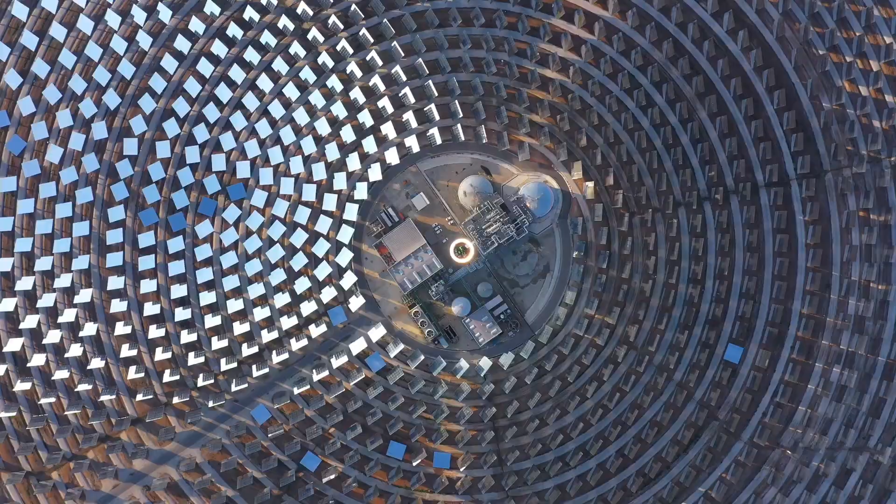So today, we will together go through four main sections: a little background about BMW, then the BMW iFactory, some of the pillars, and lastly the benefits the company received from the implementation of IR 4.0.

BMW, the acronym of Bayerische Motorenwerke, also translated to Bavarian Motor Works, is a German multinational manufacturer of luxury vehicles and motorcycles, founded and headquartered in Munich, Bavaria, Germany. The special fascination of BMW Group lies not only in its products and technology, but also in its company's history, written by inventors, pioneers, and brilliant designers.

Today, with more than 30 production and assembly facilities in 15 countries and a global sales network in more than 140 countries, BMW is a world-leading manufacturer of premium automobiles and motorcycles and provider of premium financial and mobility services. In 2022, BMW produced and sold 2.39 million passenger vehicles and 169,000 motorcycles.

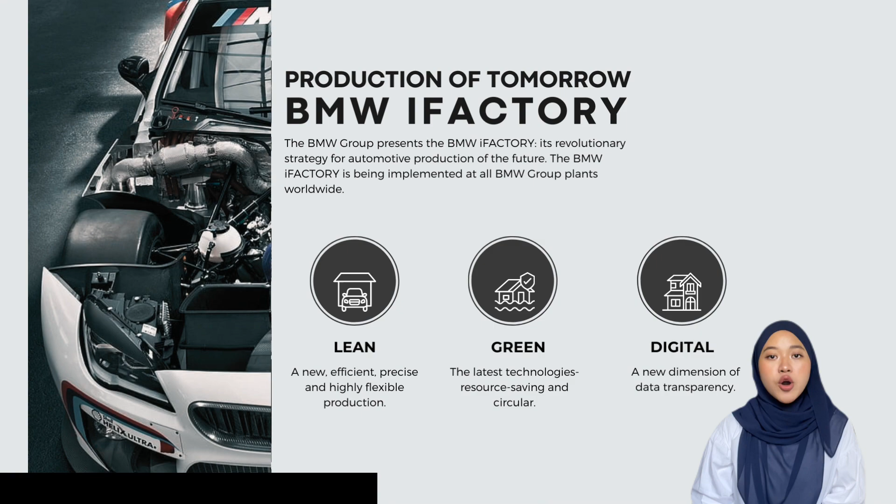The BMW iFactory is digital, using data science and artificial intelligence to become even faster, more accurate, and more transparent. In general, Industry 4.0 refers to smart and connected production systems designed to sense, predict, and interact with the physical world, so as to make decisions that support production in real time.

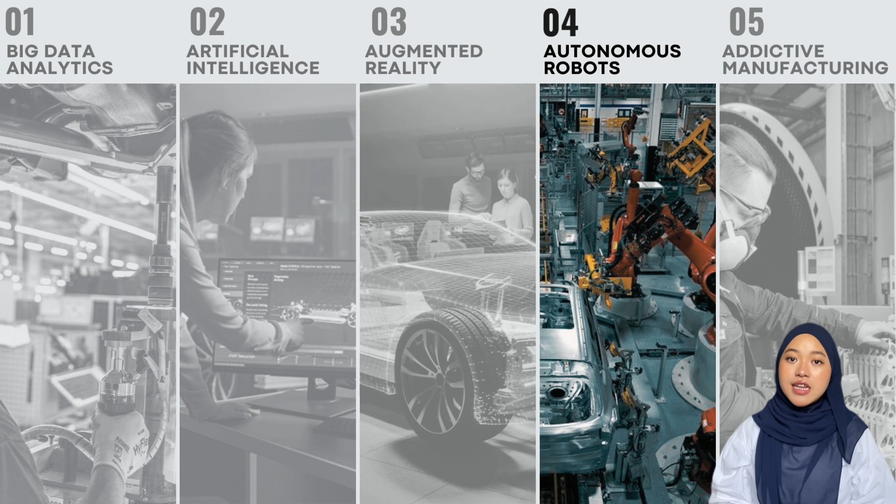Nine pillars have been introduced to guide manufacturers in transforming towards IR 4.0, and these are some of the pillars that BMW has implemented: first is big data analytics, then artificial intelligence, next is augmented reality, then autonomous robots, and lastly additive manufacturing.

The BMW Group calls it smart data analytics, which includes applications used to capture and evaluate data and improve processes. For example, they enable a 3D image of the production plant to be generated with millimeter accuracy. This 3D model can also be used for modification and calculation at the factory.

Besides that, an innovative Nutsetter is also utilized by the BMW production team. The algorithm analyzes thousands of bolt connections in vehicle assembly and provides important input for more reliable identification of errors before they occur. A green light means everything is okay.

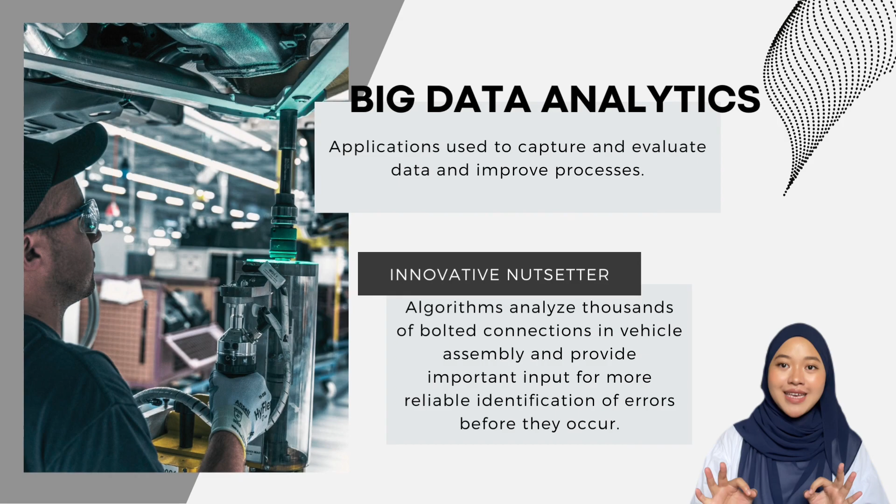The second pillar is the key technology of the 21st century and offers a great opportunity for technology, society, and the modern working world. Artificial intelligence is closely related to the first pillar explained before, which deals with data analytics and machine learning across the board.

So they apply AI to check model inscriptions against order data during the final inspection. For instance, AI alerts the employee if any inscription is not correct.

Besides that, AI is utilized to optimize robotic and material flow, as well as take simulation in the planning process to a new level.

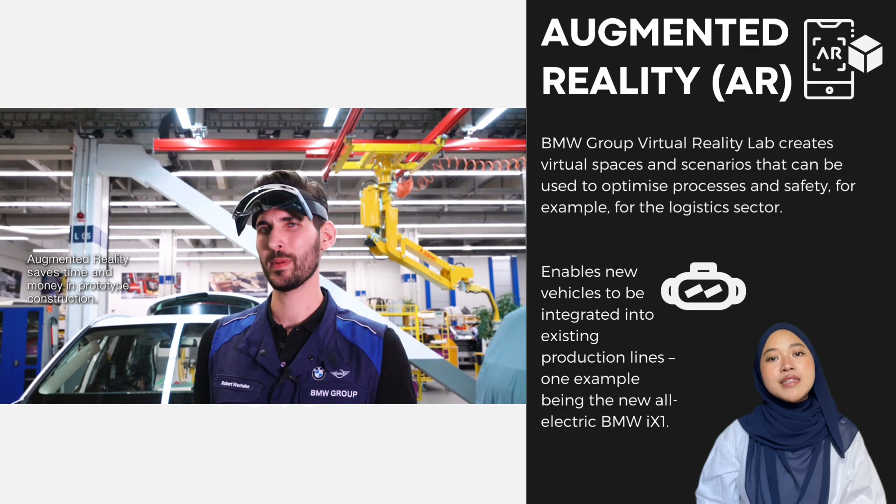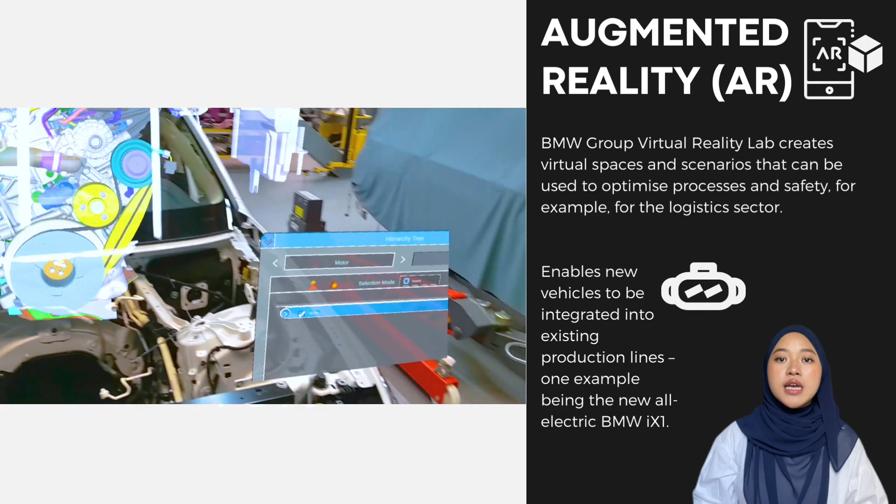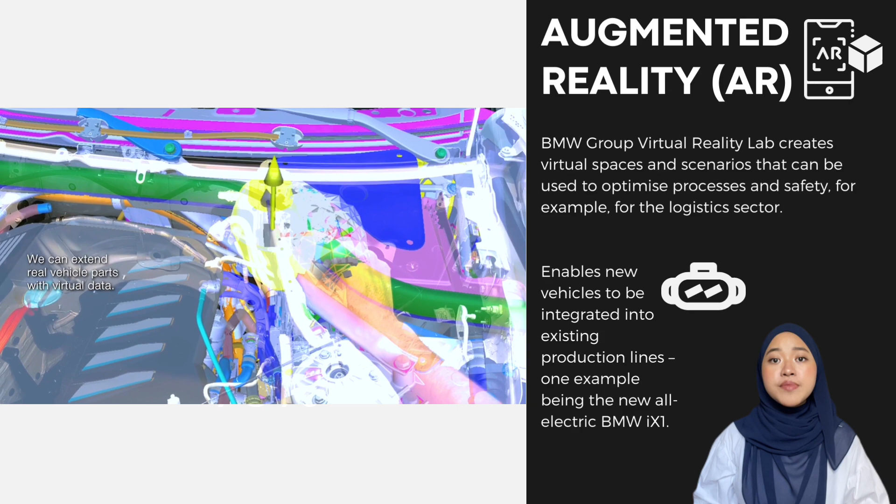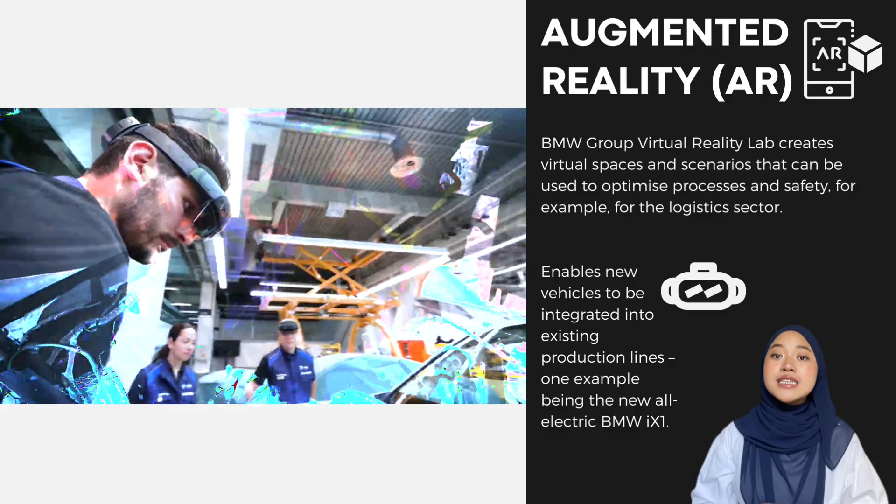Moving on with augmented reality, AR. The BMW Group has optimized the usage of AR and VR. It is used to simulate an interactive 3D environment in real time. The international team at BMW Group Virtual Reality Lab creates virtual spaces and scenarios that can be used to optimize processes and safety, for example in the logistics sector. In detail, augmented reality enables a new vehicle to integrate into an existing production line, one example being the new all-electric BMW iX1.

Innovative automation means using intelligent solutions to relieve employees and complement human flexibility and sensitivity with the strength of robots. In simple explanation, BMW is using robots to inspect, process, and mark painted vehicle surfaces. For example, BMW Group has developed a culture of collaborating with lightweight robots, where the robots work directly alongside employees, performing strenuous and high-precision tasks.

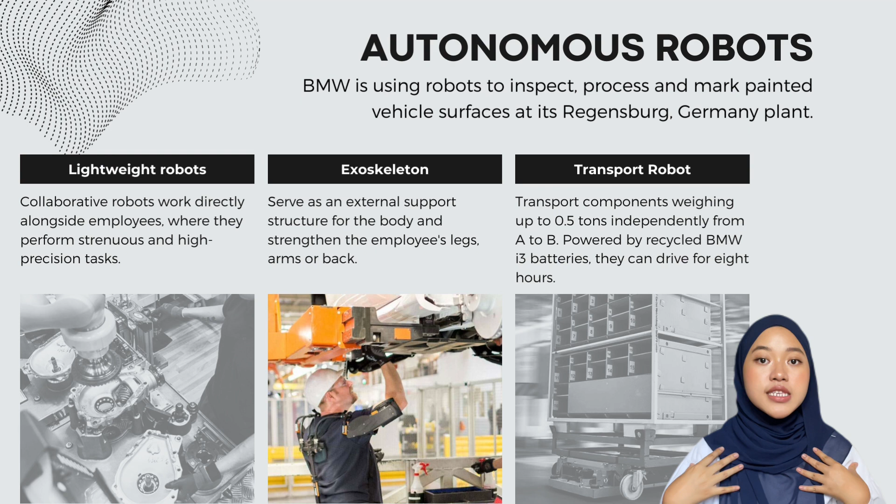Besides that, employees are using robot exoskeletons. It's like a second skeleton, serving as an external support structure for the body, strengthening the employee's legs, arms, and back.

In the logistics area, BMW Group is developing a groundbreaking system in the area of smart logistics. Smart data technology provides real-time information on the entire supply chain. This ensures that delivery of supplies to the plant can be adjusted quickly and flexibly in response to changing conditions.

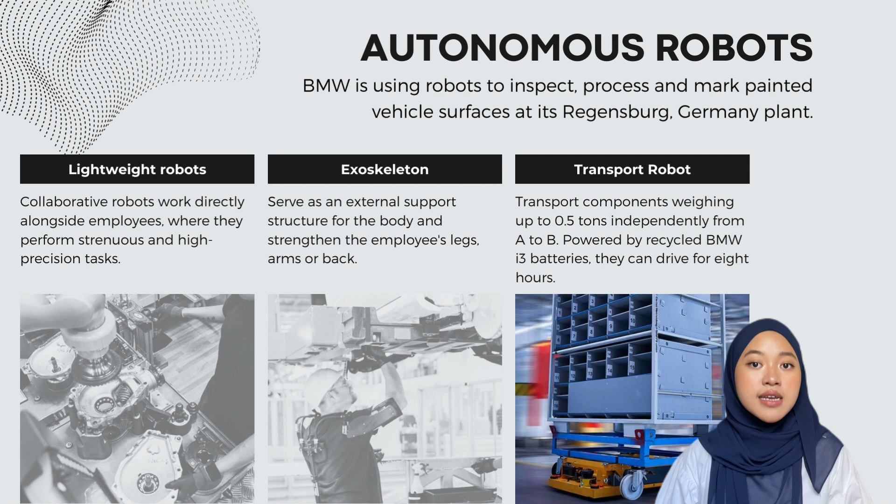So they are now using smart transport robots to transport components weighing up to half a ton independently from A to B. Once wireless transmitters have determined their location, they can calculate the best route to their destination by themselves. Powered by recycled BMW i3 batteries, they can drive for 8 hours.

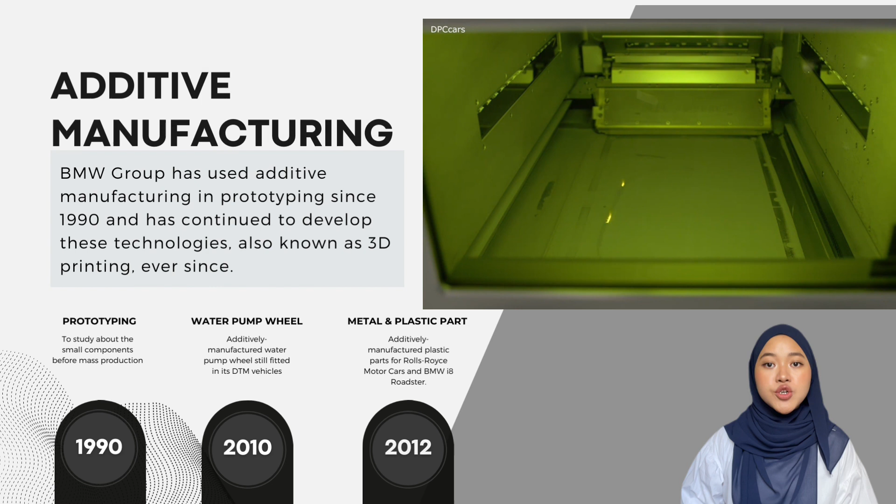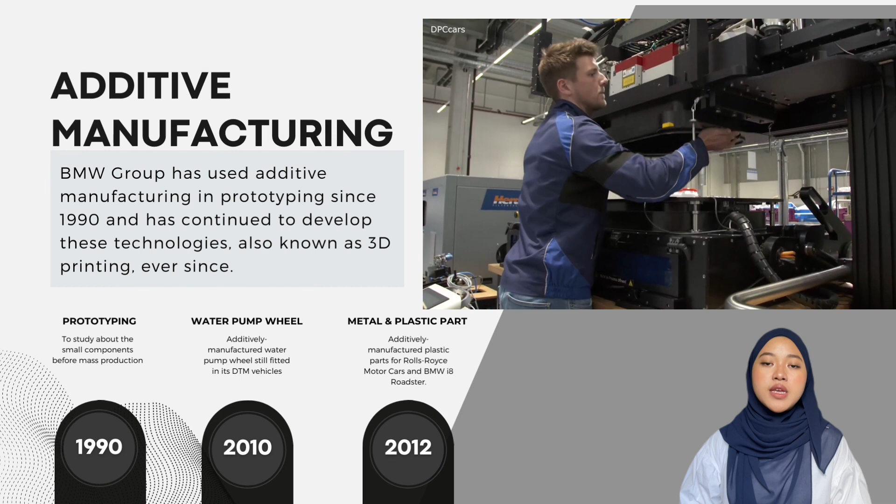For the last pillar is additive manufacturing. Additive manufacturing is not something new to BMW Group. They have used this process in prototyping since 1990 and have continued to develop this technology ever since, also known as 3D printing. BMW has used this technology in standard production since 2010.

They have successfully additively manufactured water pump wheels still fitted in its DTM vehicles to this day. In 2012, they additively manufactured plastic parts for Rolls-Royce motor cars, and metal and plastic components for the BMW i8 Roadster.

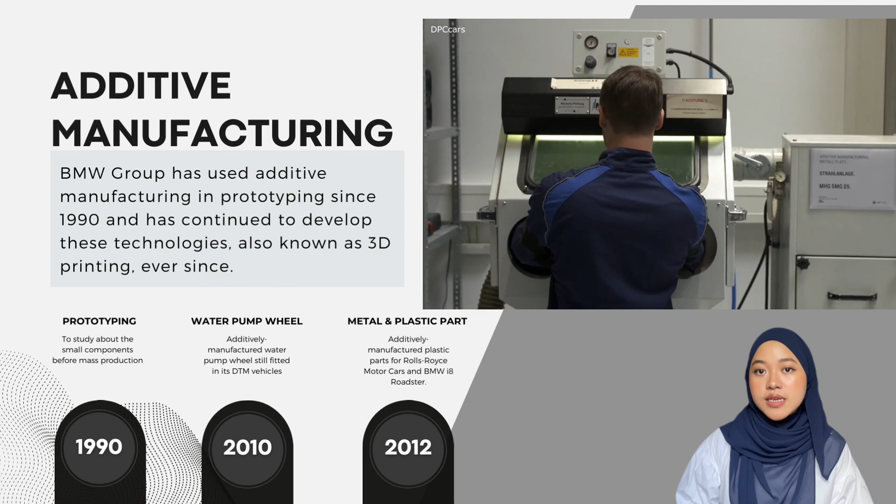Digitalization in production opens up new opportunities for the entire BMW Group production system. It enables fulfillment of individual customer wishes and enhances the flexibility and quality of production processes. So digitalization and innovative technologies are impacting the entire BMW Group production value chain, from press shop to body shop to paint shop, from assembly to logistics. Every stage of production benefits from the use of digital processes.

In detail, big data analytics provides maximum data transparency, which makes highly effective digital process design possible. With the aid of AR, it's immediately apparent where action is still needed in the production chain in reality. This saves significant time and effort. Significantly, AI ensures product quality and reduces the employees' workload, enabling components to be replaced in good time, and only those that are actually worn out.

With all these pillar implementations, BMW has shortened production time. With these tools, less production time holds great potential for more economical and flexible production.